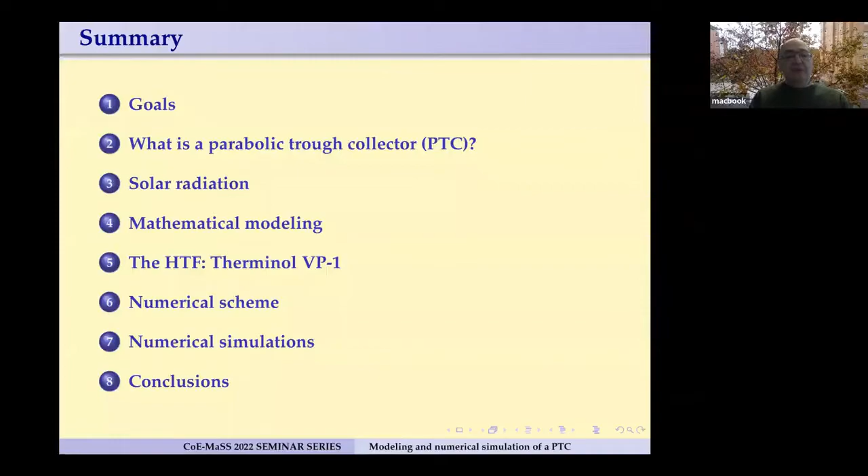So the presentation deals with solar thermal techniques arising in renewable energy technologies. The goals are to describe what a PTC is, to develop a mathematical model for the PTC heating processes, to describe a numerical scheme for the resolution of these systems, and to present some numerical simulations.

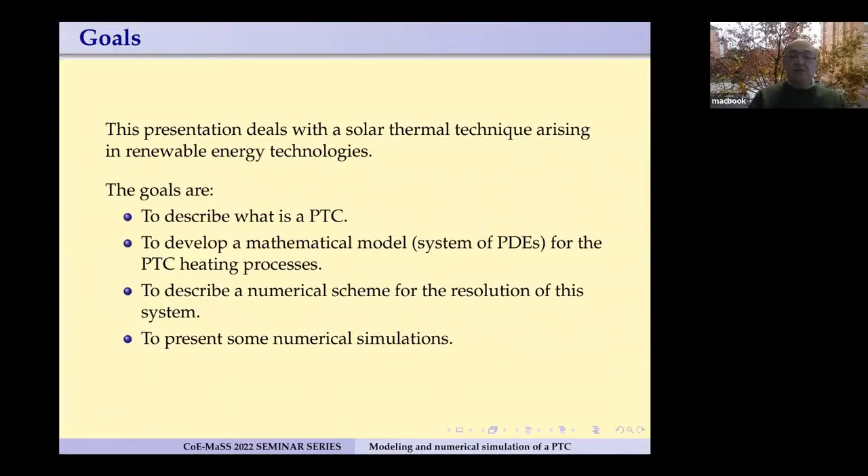Here is a nice quotation due to Jacobson and others, back in 2015. They said solar research is driven by a growing awareness of the issue of climate change, as solar technologies represent a key solution for a 100% carbon neutral future.

Solar thermal technique is a branch of renewable energy technologies. It concentrates solar energy to generate steam that powers a turbine. Different types of solar collectors are used in the industry, among them the parabolic trough. So what is a parabolic trough? Here is a picture so you can see what a parabolic trough collector is.

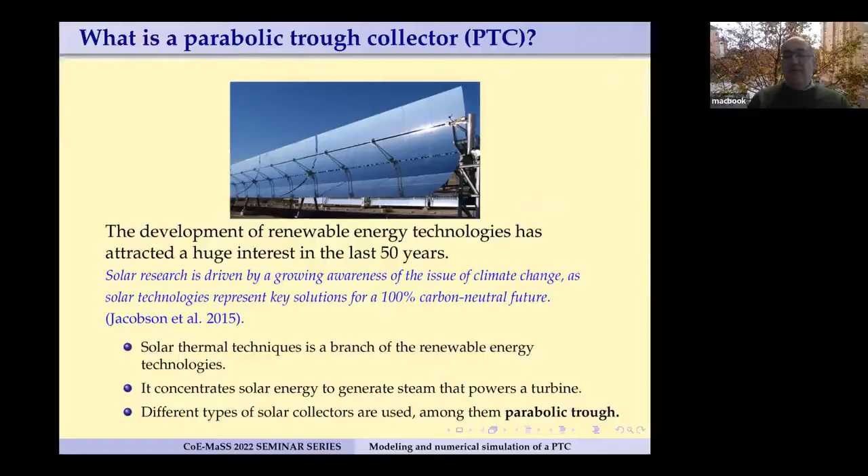So what are we talking about? We are talking about something that is an enormous, huge facility. You can see here three guys, just in the middle of the picture, so you can see how big this facility is.

In order to build something like this, you have to put in a large amount of money. What is expected is that you can retrieve some of that money that you have just put in.

This picture corresponds to a solar energy generating system in California's Mojave Desert. This is the second largest solar thermal energy generating facility - you have 354 megawatts. The first one is also in California, but near the boundary with the state of Nevada.

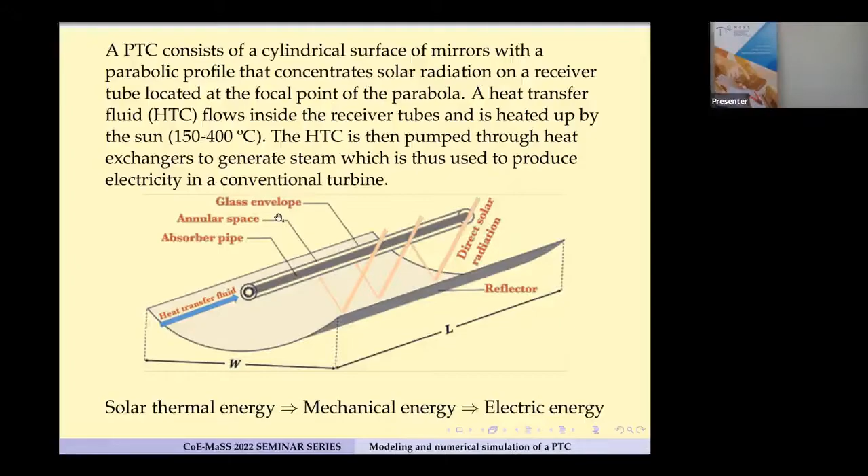A parabolic trough surface has a surface of mirrors with a parabolic profile that concentrates solar radiation in a receiver tube. This receiver tube is located at the focal point of the parabola. A heat transfer fluid, HTF, flows inside the receiver tube and is heated up by the sun. The HTF is then pumped through heat exchangers in order to generate steam, which is used to produce electricity in a conventional turbine.

So here are the elements that participate in this device. We have a reflector, a parabolic reflector, and we have the tube. The tube itself is constituted by absorber pipes and a glass tube.

The idea is that the solar thermal energy will be transformed into mechanical energy and then to electricity energy if necessary.

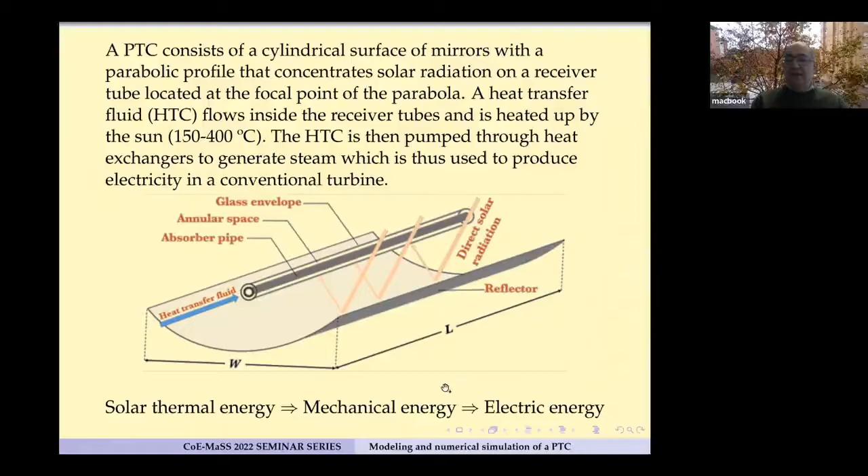I'd like to show you here a nice piece of engineering work. This is the glass envelope and the absorber pipe. In the middle, just inside, we have the tube, which is made of stainless steel, and it is surrounded by a glass envelope. At both ends, we found some elements which are very necessary in order to take into account the different physical properties of glass and steel. So we have first here the glass metal welding, and then in order to make up for the volume expansions of the steel, we need to put bellows at both ends, at every single part of this set of glass envelope and absorber pipe.

Here is something very interesting: the glass cover is transparent to the radiation of short wavelength coming from the sun, but at the same time is opaque to the radiation of long wavelengths emitted by the absorber tube. So the heat transfer fluid, which is inside the steel pipe, is an industrial synthetic oil.

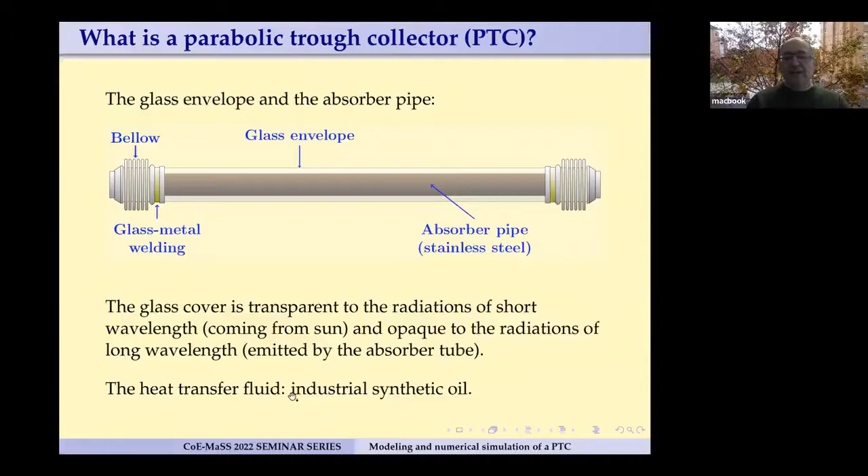So some words about the radiations. This is obviously the main source of heating of our set. What we know is we have estimated the power arriving to the outer atmosphere is about 1,367 watts per square meter. This is just at the outer atmosphere.

But since we already know that our atmosphere is stratified, compounded by several layers with different molecules and elements like dust, water vapor, etc., this power will be damped down. Some amount will be absorbed or lost, some amount will be scattered to space, and so the direct radiation on the Earth that we can take advantage of is in the interval of 33% up to 83%. This amount will depend on the site you are measuring, on the latitude, on the longitude, on the altitude, and also on the time, the hour you are measuring that quantity. It will change during the daylight.

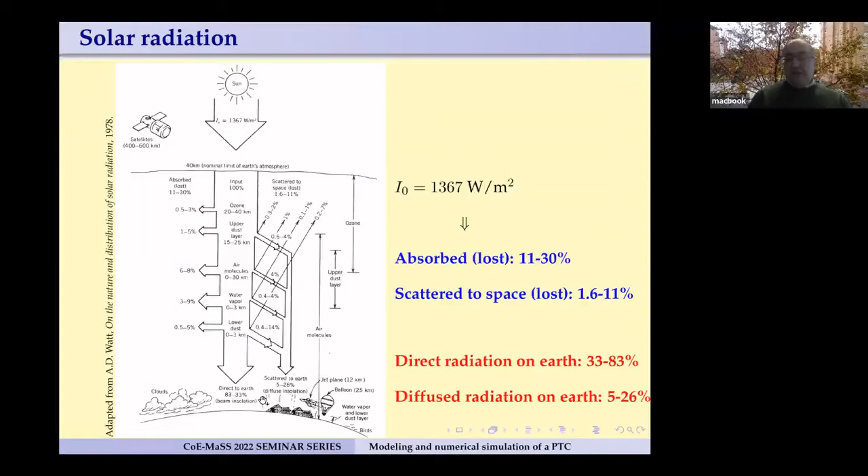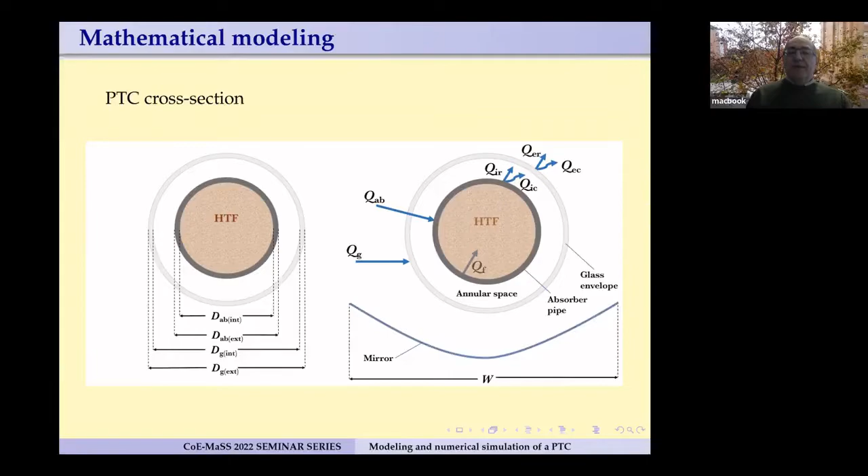So now, in the mathematical modeling, we just take into account the thermodynamic balance for the temperature on the glass, for the temperature on the absorber pipe, and for the temperature of the heat transfer fluid. So our unknowns are TG, TAB, and TF. What we need to do now is express these source terms in terms of the direct radiation and in terms of the unknowns.

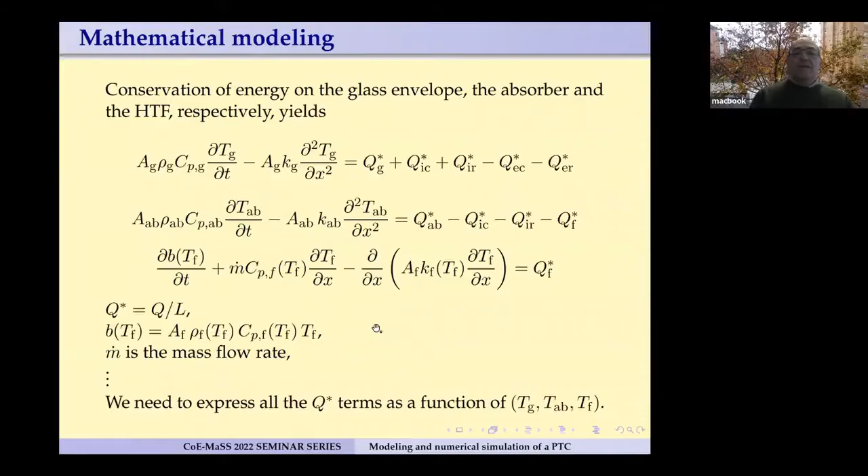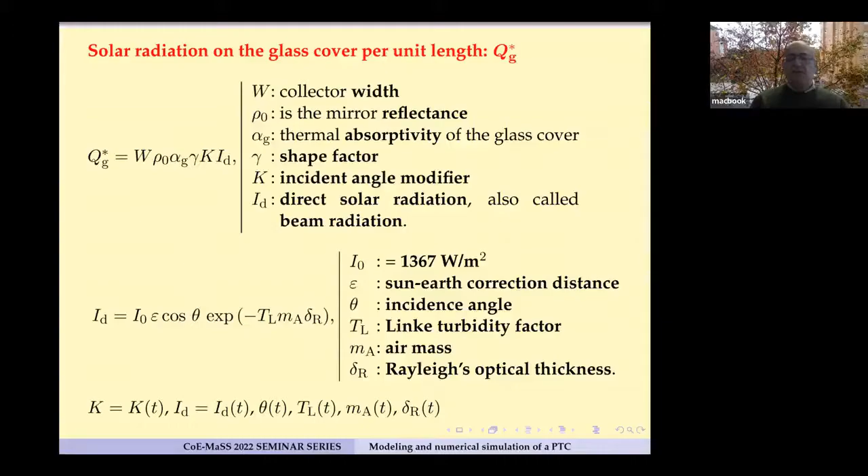To do so, we need to consider many physical properties of the elements that participate in this device. The first one, QG, is proportional to the direct radiation term, which involves many expressions that must be computed, like the incidence angle, Linke turbidity factor, air mass, Rayleigh's optical thickness, and so on. These functions are time dependent, depending on the hour of the day measured in seconds, and also depend on the site, on the terrestrial coordinates where you are measuring these quantities.

Now for the glass cover, for the energy from the absorber, we have to take into account two different situations.

So if we have no pressure, if the pressure is negligible in the annular space between the glass cover and the pipe, then we use this formula. But when this space is filled with gas, for instance air, then we use this correlation due to Raithby and Hollands. This is a correlation for natural convection in an annular space between horizontal concentric cylinders.

Here there is a function keff, which is proportional to the difference of this temperature. And this coefficient here is the effective thermal conductivity, which is a non-linear expression of Tg and TAB.

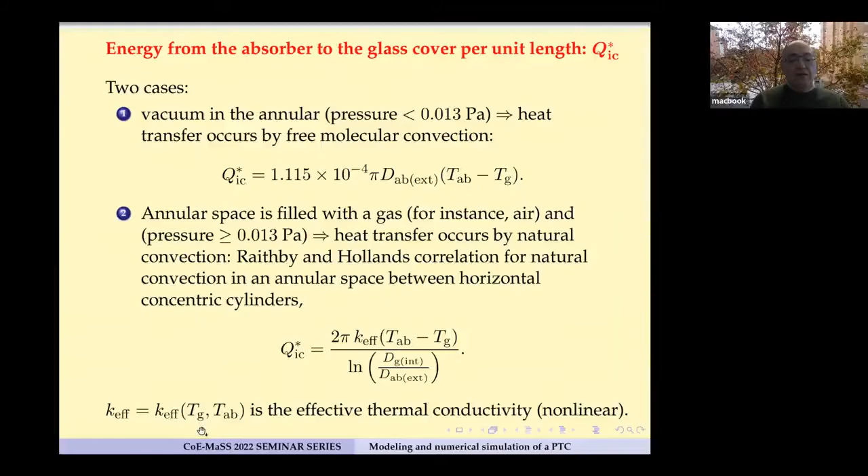So for the radiation heat transfer rate, we use the Stefan Boltzmann law based on the geometry, emissivity, and temperature of the glass cover or the absorber. So we found here the usual difference of the temperature to the power 4th, given by Stefan Boltzmann's law.

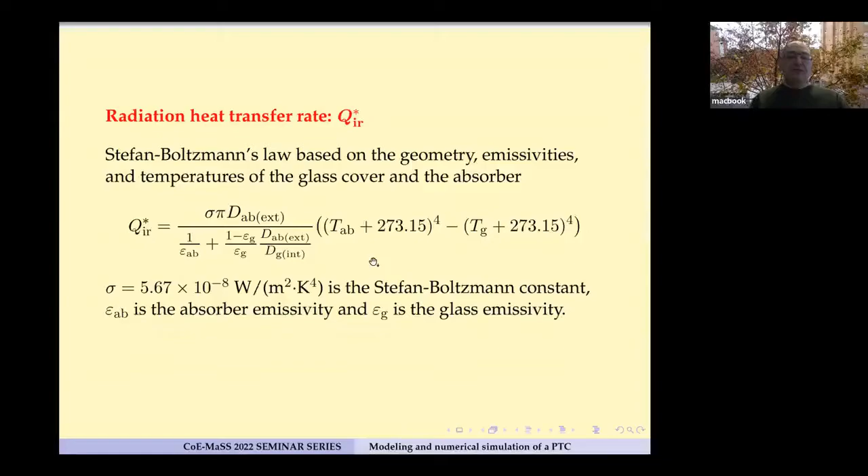Now for the heat transfer from the glass cover to the environment, this convection term represents the largest cause of heat loss, especially in the presence of wind. This can be estimated from a correlation due to Zhukauskas back in 1972. He proposed these correlations where the Reynolds number and Prandtl number participate in these expressions. Depending on the Reynolds number, we have to take different values of the coefficient C and the value of m.

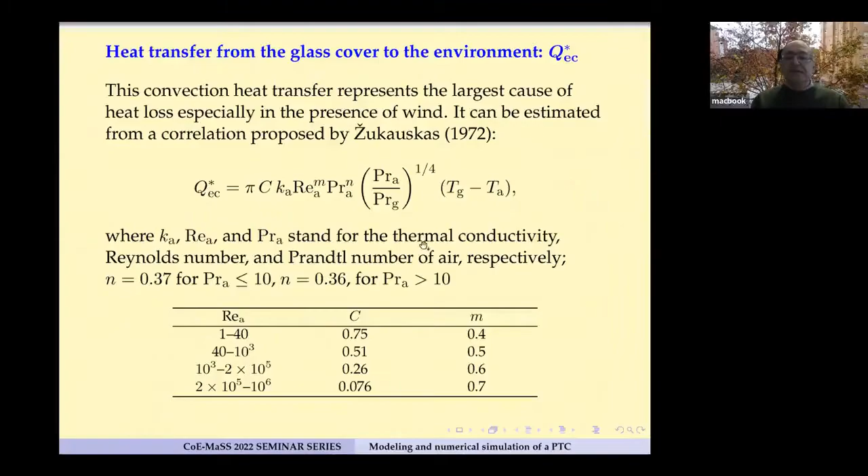So for the external radiation heat transfer, we also use the Stefan Boltzmann expression. But here we are taking into account the temperature on the glass and the sky temperature, T sky. T sky is evaluated from a correlation proposed by Swinbank, which gives this expression, where Ta is the ambient temperature. These Ta values must also be tabulated from the maximum and minimum temperature along the day of the year we are considering.

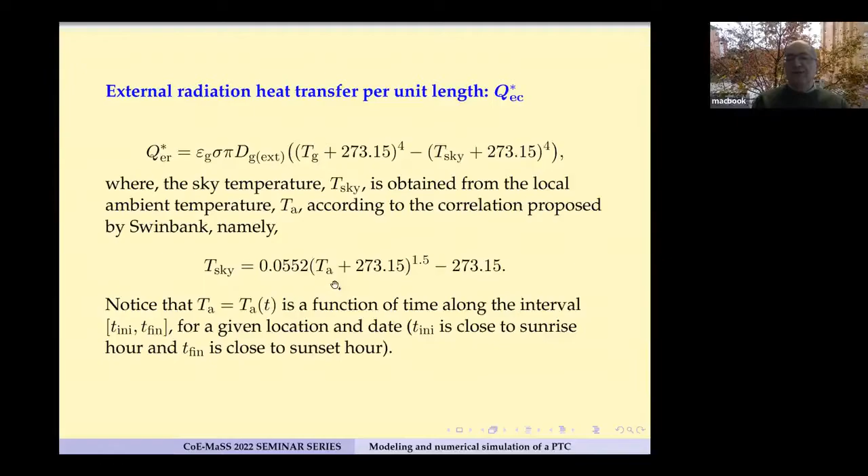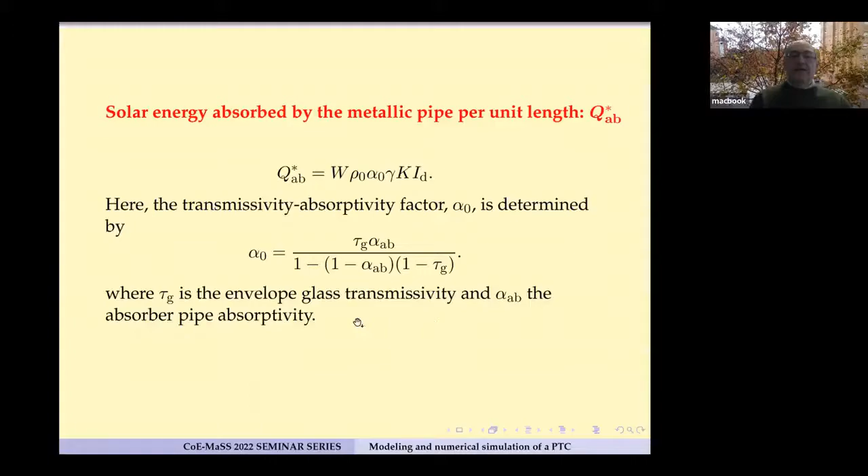So for the solar energy absorbed by the metallic pipe, we have another formula which is proportional to the direct radiation. Here we have some coefficients which depend on the physical properties of the steel, the material the pipe is made of.

We saw it in a paper which has been recently published in 2019, and by using this formula we obtained some numerical results that were reasonable, and we were very happy with using this formula.

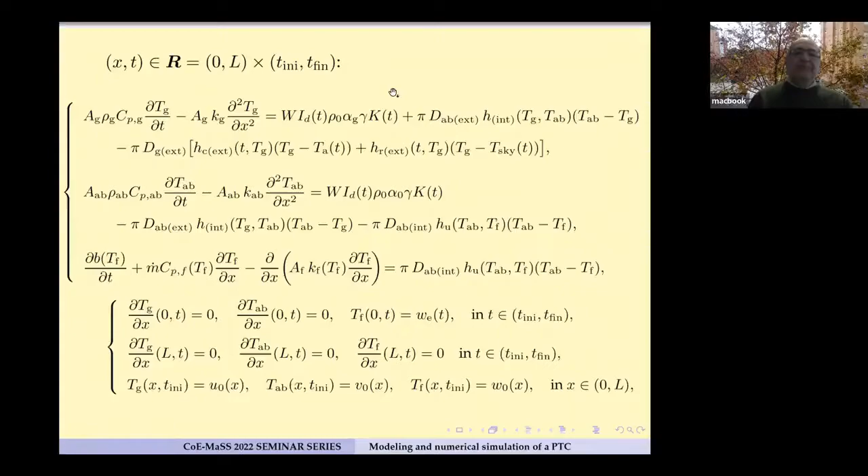So some words about the HTF used in our numerical simulation: we have used Therminol VP-1. Why did we use this HTF? We considered a first paper where the numerical simulations were made using this fluid, so that we would like to compare our results with the ones that paper had shown.

That paper had shown this. On the other hand, the manufacturer of this synthetic oil has a very detailed technical report where every physical property is tabulated, so that we can derive mathematical formulas for the density, the specific heat, and so on. Evidently, this synthetic oil has temperature-dependent physical properties: density, specific heat, thermal conductivity, and so on. Everything depends on the temperature.

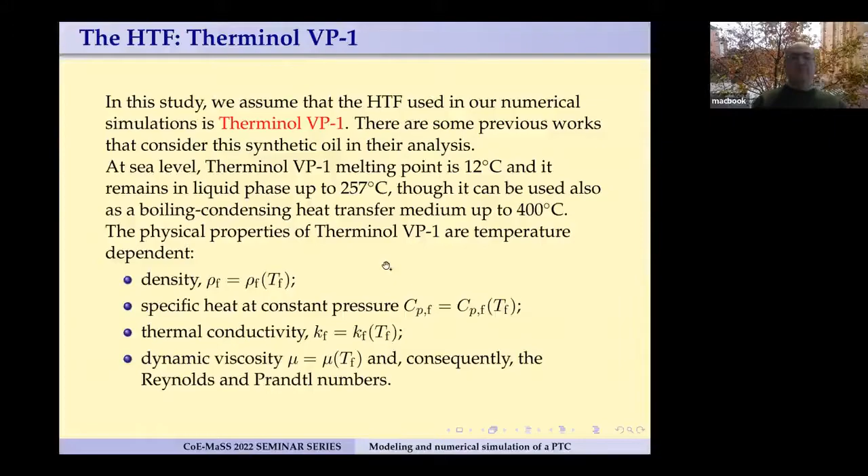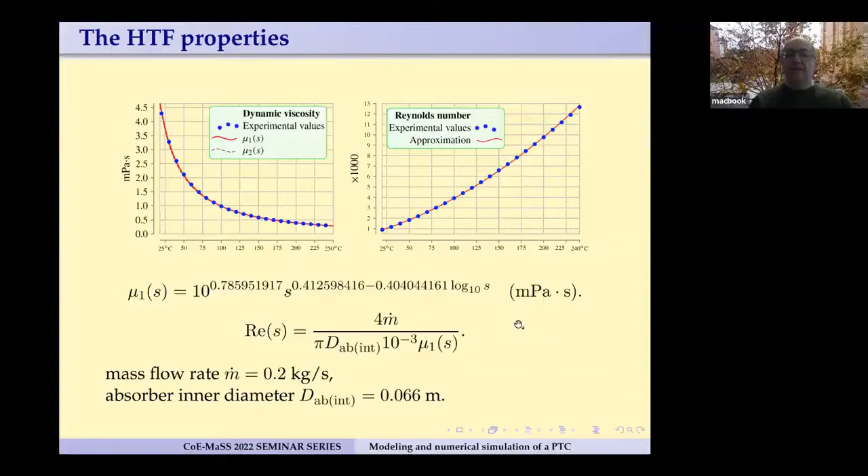So what we have done is develop, from the technical report, some mathematical expressions for these physical quantities. We have done this by the least square method, for every physical property. So here is the thermal conductivity, then the Reynolds number, and so on.

The blue dots here represent the data provided by the manufacturer, and the solid red line is the formula that we have developed, as I said, by the least square method.

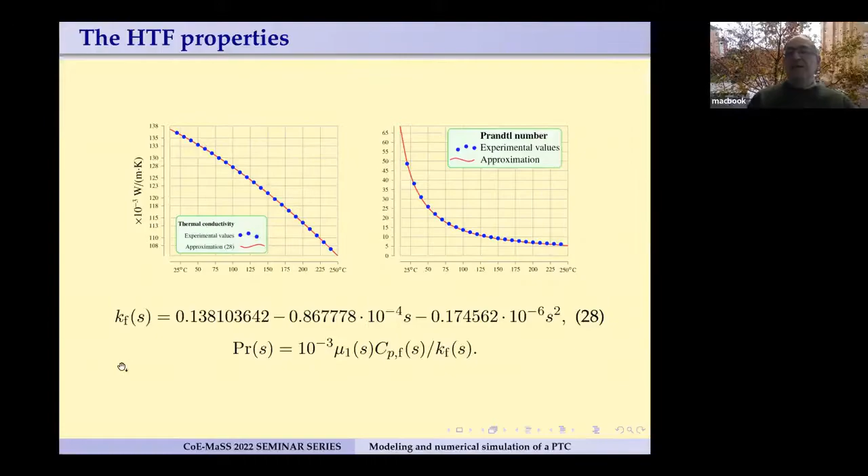Okay, so now we go back to the mathematical modeling. As a mathematician, I prefer to use my unknowns U, V, and W instead of TG, TAB, and TF, which is a bit cumbersome. So my model writes like this. This is a set of three parabolic equations in 1D dimension, with some Neumann and Dirichlet boundary conditions and some initial conditions.

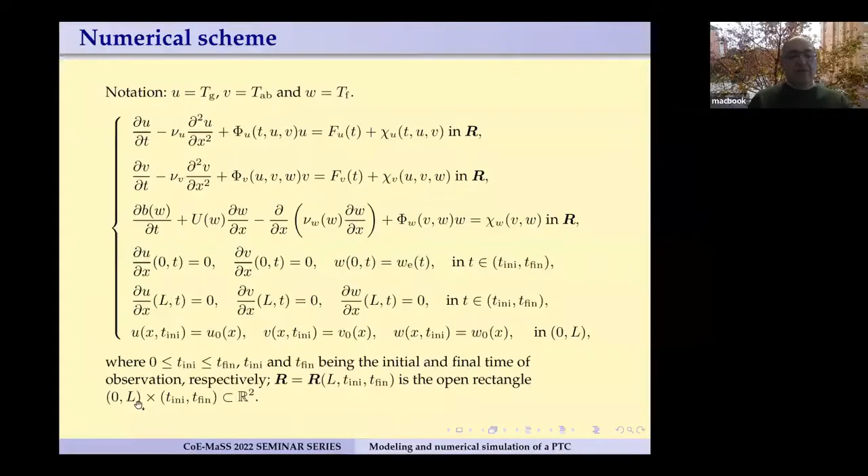So we want to integrate these equations along an interval of time, t initial and t final, so that t initial will be close to the sunrise, and t final will be close to sunset. And obviously, we are integrating this equation in space all along the full length of the pipe.

So in order to obtain some numerical results, what we have done is to derive a predictor-corrector scheme with respect to time, with respect to the semi-discretization in time. As a predictor scheme, we have used a semi-implicit Euler method, and as a corrector scheme, we have used a semi-implicit Crank-Nicolson method. This is quite convenient because the combination of this predictor-corrector scheme has given us a scheme with some very interesting stability properties. We have made 4,000 iterations in time.

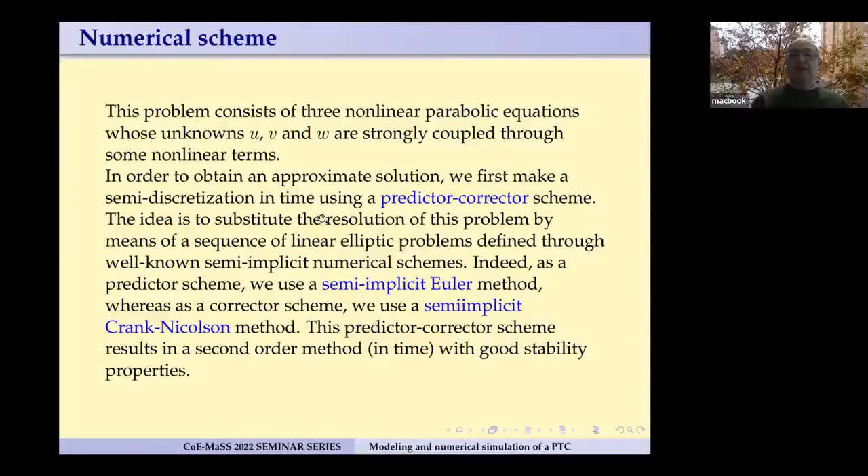In fact, for the predictor, we have to solve three times a 1D equation. For the corrector, the same, three times a 1D elliptic problem. So at every iteration of time, we have to solve six times a 1D elliptic problem. So this is the description of my numerical scheme.

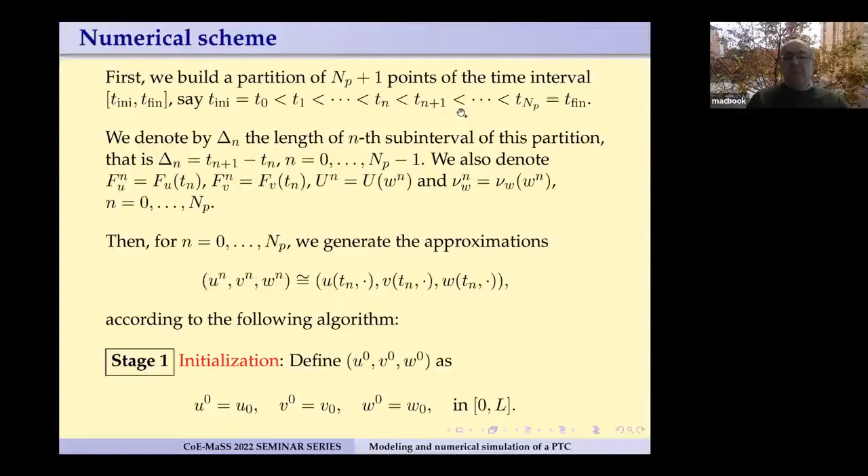As usual in the finite difference method, we take a partition, not necessarily equally distributed. And so we begin with the first one. Then at stage 2 is this prediction by using the semi-implicit Euler method. We compute this U bar, V bar, and W bar at iteration n+1 like this. So first we compute U bar like this, then V bar, and then W bar.

And here we are using the already computed U bar. And in the equation for W bar, we are using V bar. So the integration, the computation of Un, Vn, and Wn bar is sequential.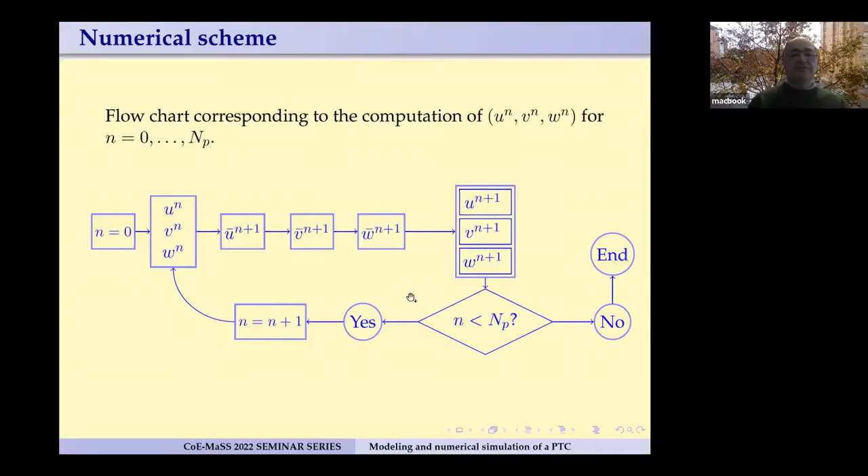Then what we have here is a 1D elliptic problem, and this one has been solved by using the finite element method. We have, in fact, just to compare the results, obtained 1st order and 2nd order approximations. So we use polynomials of degree 1 and polynomials of degree 2, to compare the results.

Eventually, what we have realized is that it is not worthwhile to use degree 2 in this setting, because the result obtained with degree 1 or degree 2 differs by less than half a degree all along the computation. And we can afford an error of half a degree in our computation, because we are talking about obtaining values of temperature of about 160 degrees and so on.

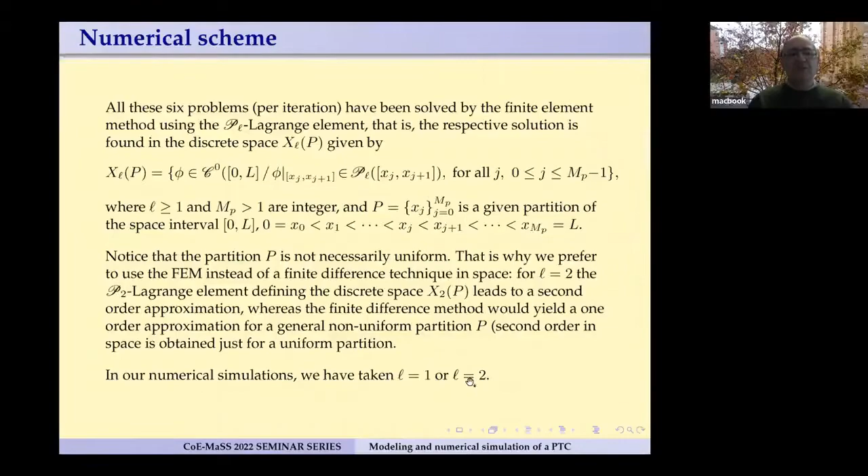So what we have done is to implement this numerical algorithm by using the FreeFem++ package. This is freely distributed. You can download it from the web page, and it is a very powerful tool in order to solve partial differential equations in 1D, 2D, or 3D.

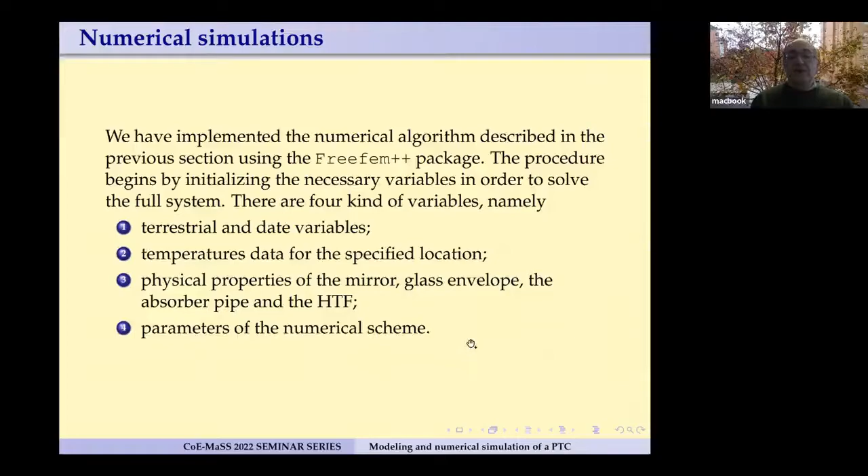So the procedure begins by initializing the necessary variables in order to solve the full system. Then there are 4 kinds of variables named. The first thing to do is to provide terrestrial and date variables. Then the temperature data for the specified location. Then the physical properties of the mirror, glass envelope, the absorber pipe, and the HTF. And then the parameters related to the numerical scheme.

So what we have done is just consider the site of Tetouan, the town of Tetouan in Morocco. So we provide the location, the latitude, the longitude, and the altitude, to our program. We must say what is the time zone for this specific site. So Tetouan is GMT+1. I think Johannesburg is +2.

Then we must provide a specific date in order to make our computations, and we need also to specify the solar tracking system used in this setting. So we have used what we call east-west polar.

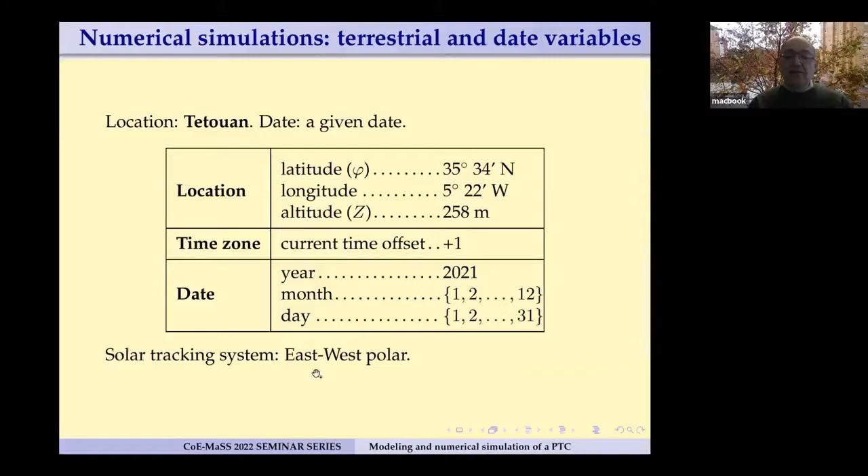In this, you must provide some information about how you are tracking the sunbeams all along the day. This is one possibility to do it: east-west polar. I have no much time to give details about this.

From terrestrial and location data, we first compute the true solar time. This function is computed from all this data using astronomical formulas, computed on a Julian day basis, so it is computed by the second. Then the ambient temperature is evaluated.

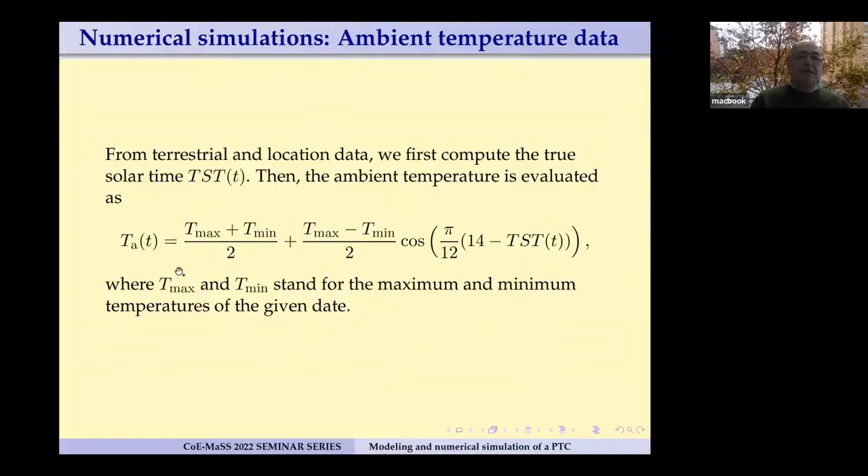This is the formula we have used in order to evaluate the ambient temperature along the day. We must provide this function Tmax and Tmin from the specific site.

So what we have done is use again the least square method in order to develop a formula for the temperature, for the maxima temperatures and the minima temperature. So this is what we have obtained.

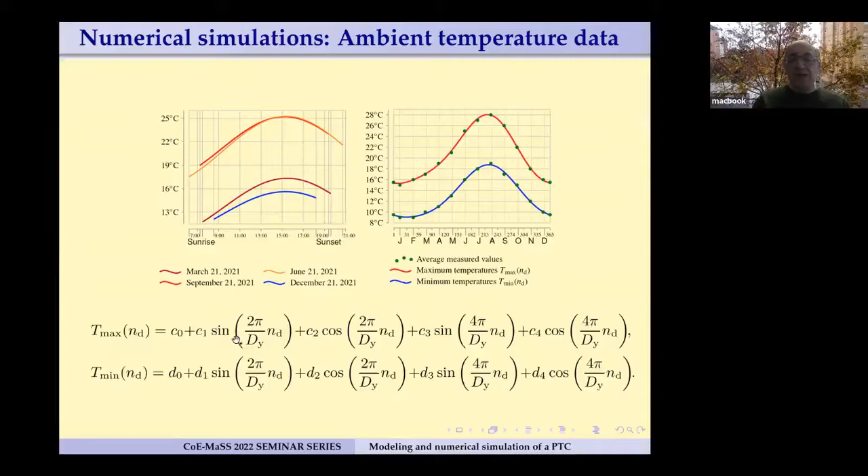For the specific site of Tetouan, the values of these coefficients, C and D, are these. So we provide this value to our program for the specific site of Tetuan.

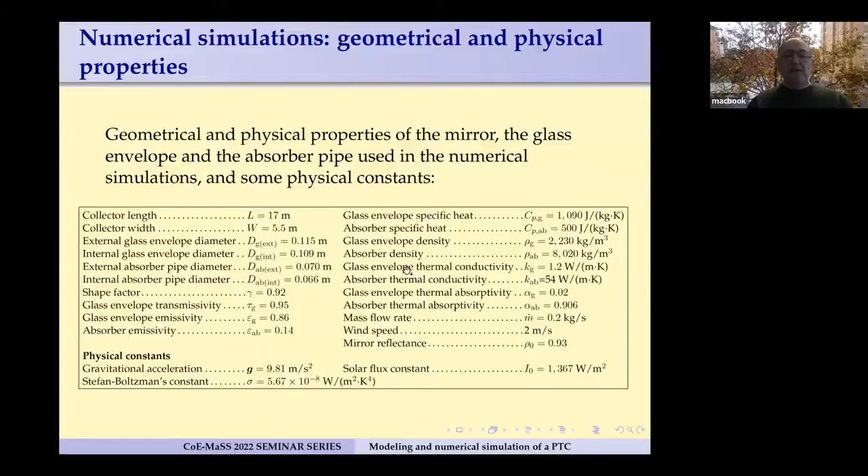Then we have a long list of physical values for the description of the material we are using in our device - the glass, the pipe, the stainless steel, and so on.

Now the parameters coming from the numerical scheme. We use here, as I said, an implicit Euler Crank-Nicolson scheme.

We have taken as the initial time value the sunrise hour, which has to be computed every day, plus 15 minutes. Then as a final time, the final instant is sunset plus 6 minutes. And we have taken 4,000 points in our discretization.

We have used a uniform partition for the time discretization.

As long as the 1D finite element method is concerned for the space discretization, we have used polynomial of degree 1 or polynomial of degree 2. For the partition here, we have used a Chebyshev distribution, so that these points are more concentrated at the boundary than in the middle of the interval.

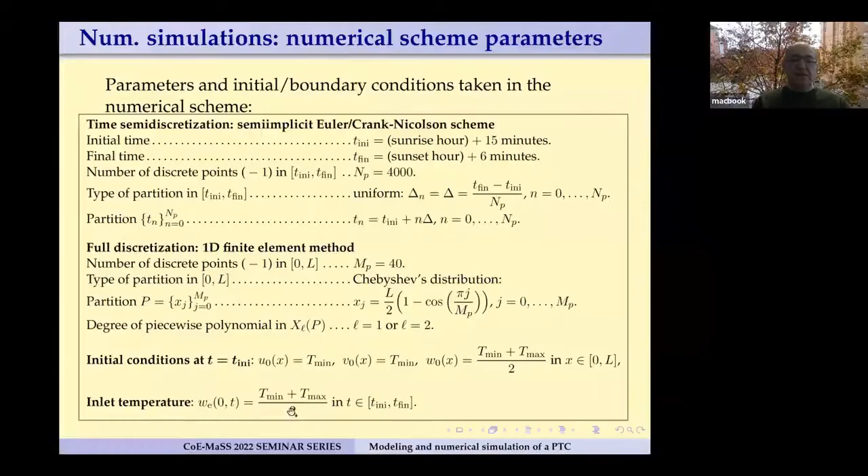Now we have obtained these results, at the specific site of Tetuan, at the specific date. We are assuming in every computation, in any day of the year, which is in fact not true, that we have a clear day sky.

So there are no clouds in this case, and we have made this computation. If the day is cloudy, then the computation must be redone so that there is a reduction of the direct radiation arriving to a specific location.

As you can see here, we are representing the outlet temperature evolution - these are the maximum temperatures we have obtained in our computations. In red, the solid line is the temperature on the absorber, then the fluid, and the blue one corresponds to the glass. So for different dates, we obtain obviously different evolution of the temperature.

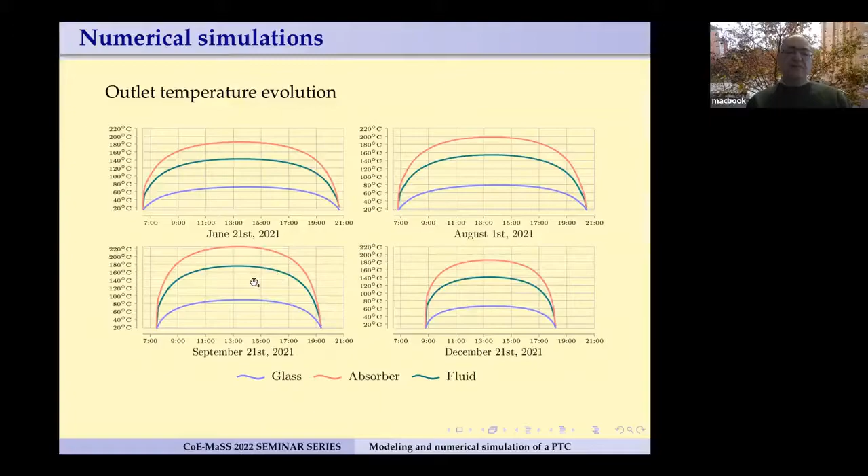This is a comparison of this temperature. We have represented here the outlet temperature of the fluid for 6 different dates, so you may compare the different temperatures you obtain depending on the date. And here we have represented the temperature all along the full length of the pipe. So what we see here is an almost linear behavior of this temperature.

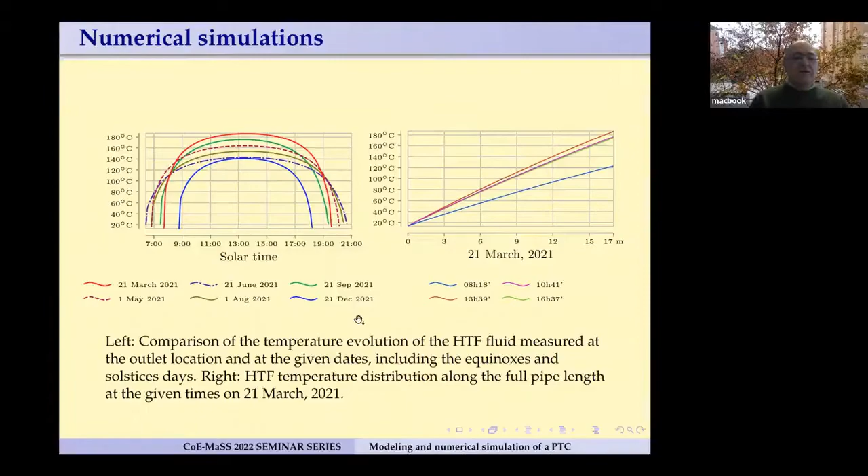Another aspect you must take into account is the efficiency of your device. We measure this efficiency as the fraction between the power obtained by the PTC and the power arriving in the PTC from the sunbeams. We measure this quantity all along one day. We have compared here what is happening at this equinox date and this solstice date in order to measure and compare this efficiency.

So we obtain an efficiency between a value greater than 60% and a value a bit greater than 80%, which is not so bad.

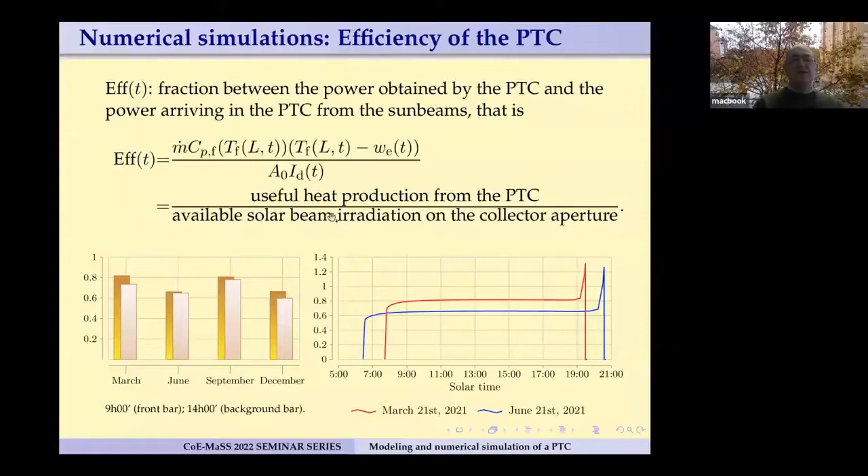As a conclusion, I must say that renewable energy has been a standing trending topic for the last decades and has attracted the attention of many public and private companies worldwide. The decision of building a solar parabolic trough plant in a specific location must be supported by the quality of the future performance of this facility on an annual basis. In this regard, mathematical modeling and numerical simulation has shown to be a powerful tool in order to predict the performance and efficiency of a solar thermal parabolic trough plant.

We have fully detailed a mathematical model for the description of the temperature, Tg, Tab, and Tf in the 3 different elements of the PTC, namely the glass envelope, the absorber pipe, and the heat transfer fluid. The numerical algorithm combines the finite difference method with the finite element method. This predictor-corrector scheme has shown good stability properties after 4,000 time iterations.

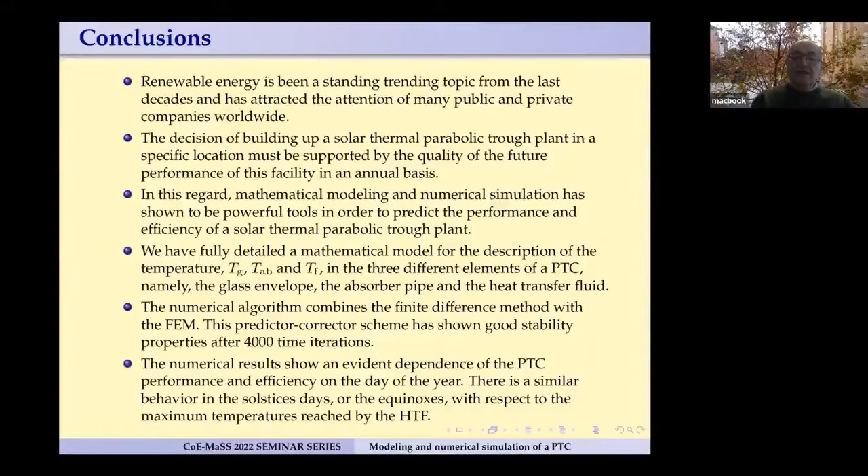The numerical results show an evident dependence of the PTC performance and efficiency on the day of the year. There is similar behavior on the solstice days or the equinox days with respect to the maximum temperature reached by the HTF. And so here is some bibliography.

So thank you very much for your attention.